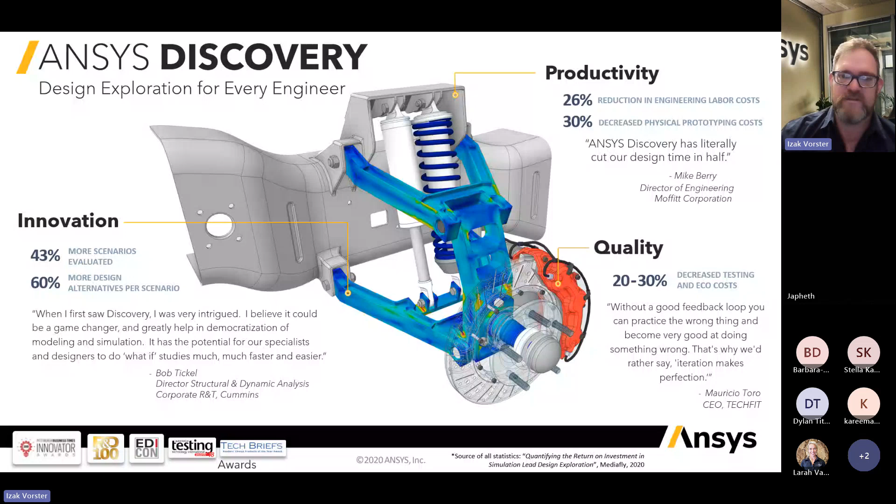Once I figure out how to advance my slides, I'll go to my next one. Yes, there we go. I'll open up the software now so you can see the interface and how it interacts with the user.

In a nutshell, there's geometry preparation included in the software. You can create geometry from scratch, modify geometry coming from somewhere else, scan geometry - this used to be Ansys SpaceClaim, so it's an extremely powerful CAD tool meant for simulation. If you're doing simulation, you don't want all the welding gaps or holes to be there, because they're irrelevant, for example, so to remove those things, it's excellent at doing that.

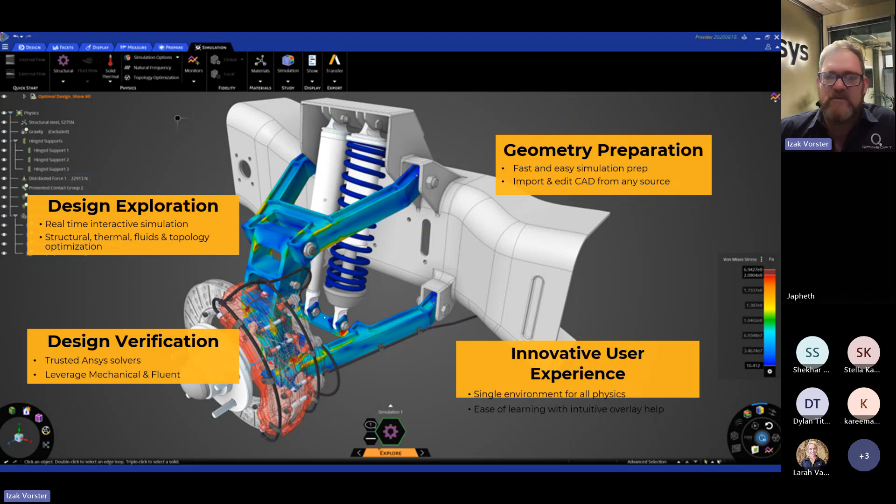The user experience is really very innovative - it's an excellent way to model and work. You can see everything on the same screen. It's a very simplistic menu system at the top with very few commands, but they're really very powerful. You'll see some of the commands in my demonstration in a while.

As far as geometry preparation goes, you can import CAD files into the modeling part, very quickly clean up things, and edit geometry you created previously. It's really very good at converting faceted data to surfaces or solids, so if you've got scan geometry and want to create geometry from there, this is really where Ansys Discovery excels.

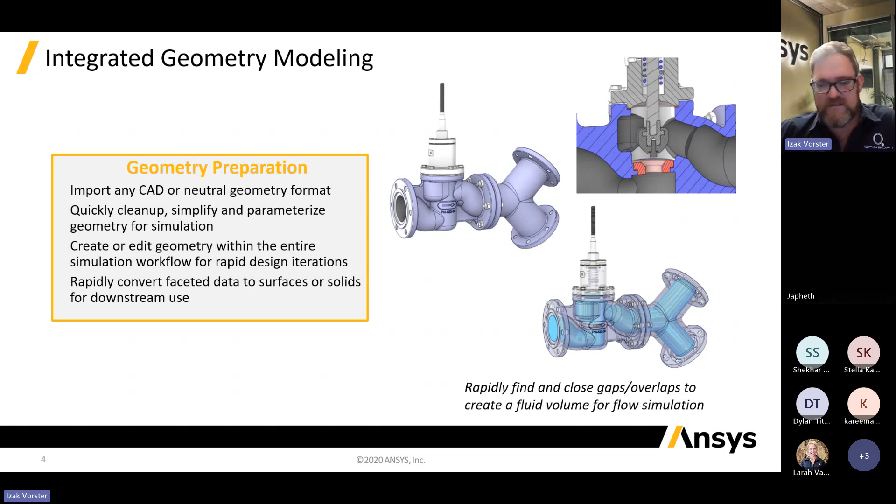Then there's a fluid simulation part, which I'm going to show a bit about today. This is for internal and external flows mostly - not for free surface flows like water in a channel, so there are some limitations with this software. But if you have to look at internal or external flows and alter a couple of design parameters to come up with an initial prototype idea, this is excellent to do that.

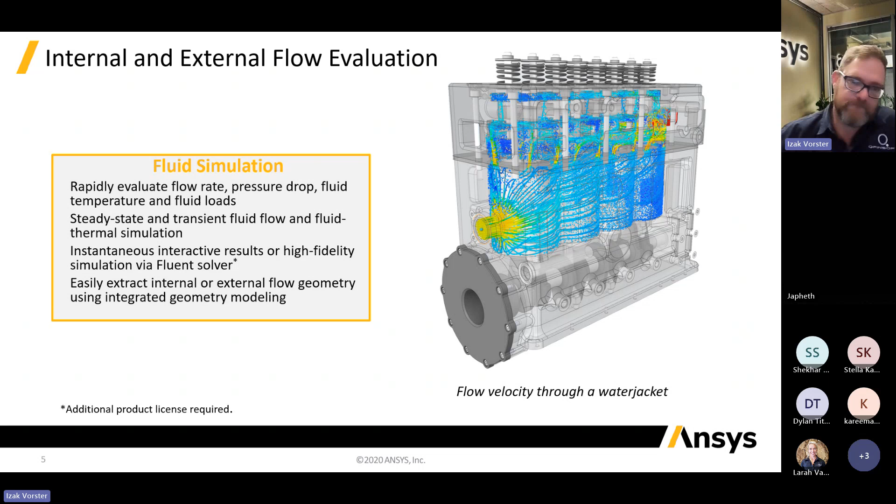There's also a fully functional topology optimization tool inside Ansys Discovery modeling. What it does is actually run a stress analysis, and it will remove the nodes or elements that don't carry any stress.

And it will come up with an optimized shape that will still be able to handle the loads that it experiences, but it will give you this shape.

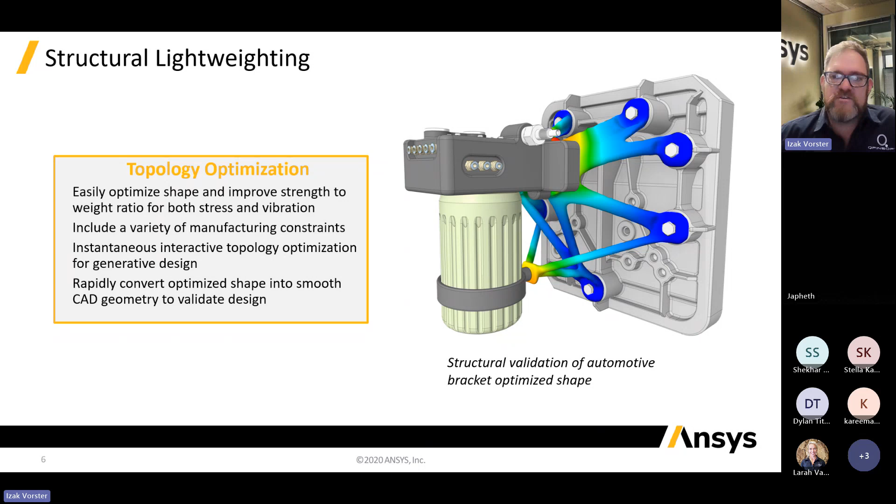This is excellent for people in the additive manufacturing industry, where they are looking to 3D print some of these components. But it is also a very handy tool for engineers to see where they can remove material from a standard bracket while still complying with the design specification.

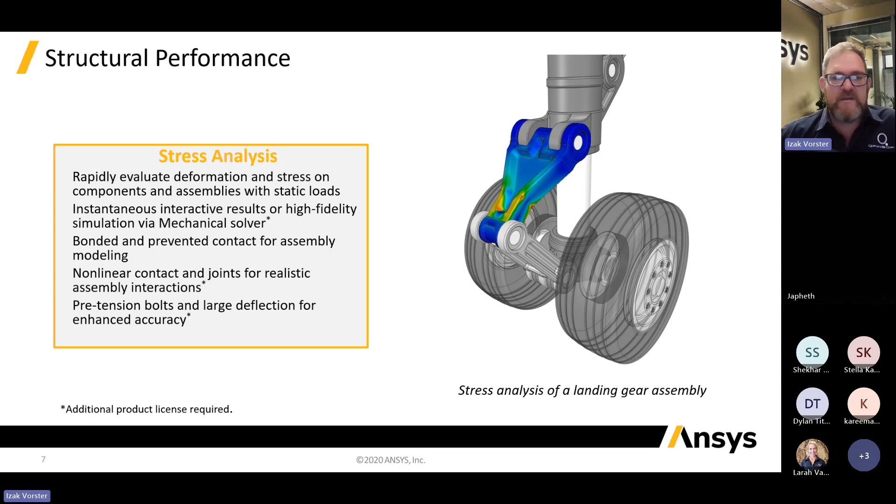Then it's got a full-blown stress analysis tool in there. This includes nonlinear contact and joints for realistic assembly interactions. You can do pre-tension bolts, large deflection for enhanced accuracy, and it gives you instantaneous results. I'll quickly show how that works in my demonstration for you guys as well.

Then modal analysis is very important, as a preliminary kind of analysis with every single analysis you do. If you're a regular FEA user, you always start with a modal simulation to see if everything is fixed, etc.

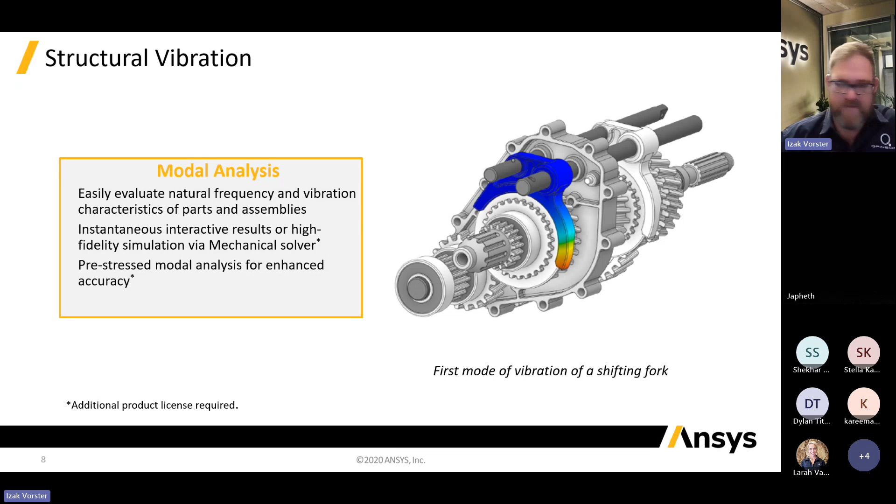And that will give you the natural frequencies of the design so that you can keep them away from the motor operating frequency, or if it's a pump or a rotor, the blade pass frequencies, the harmonic frequencies, or whatever frequency gets excited by the driving components.

Then the thermal simulation is very strong. This is used a lot in electronics, where you've got a PC board with some heat sinks, etc. You want to optimize the heat sink or see how big it must be. You can do that thermal simulation.

Back in the day, Ansys sold something called Ansys Icepak, and that was specifically for doing electronics cooling. In my opinion, it still exists, that product, but this is really taking over that product entirely at a fraction of the cost to be able to do these thermal simulations for electronics.

This is also applicable to any kind of thermal simulation where you're heating something up, and it will give you boundary conditions, convection, heat, insulation, and temperature conditions.

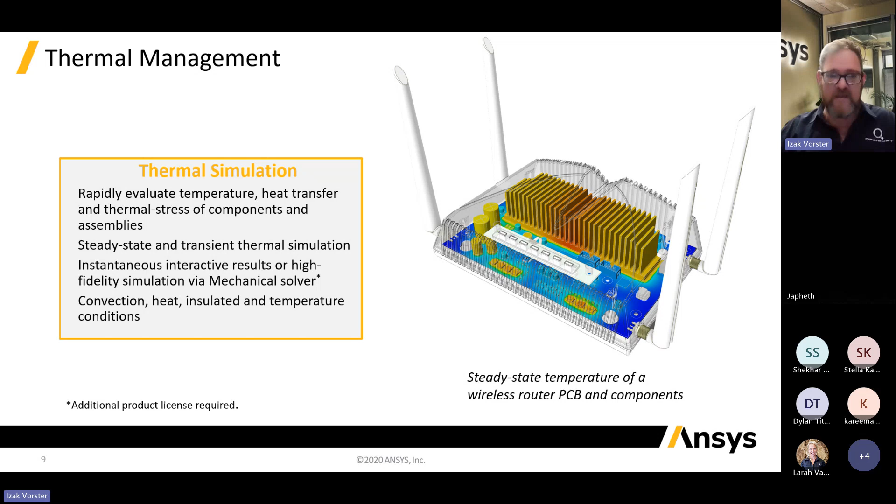And then I think the powerful thing about this is what's next. If you are finished with the concept things and you want to go over to a more detailed analysis, you can transfer this to Ansys Full Mechanical or Ansys Full Fluent. There is another way to go to the refine mode, which I'll show you in my demo.

There are 3 modes in Ansys Discovery. I'll explain that a bit later. But this will take the model and the mesh and everything that you did in Ansys Discovery modeling and directly transfer that to the flagship solutions from Ansys.

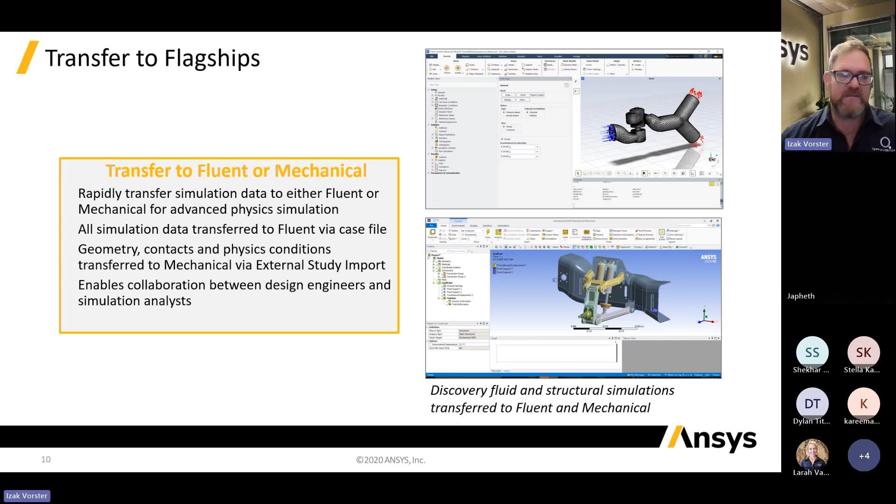And you can continue detailed simulation there further, with more detail, maybe some chemical or phase changes, maybe some crack propagation, etc., fatigue analysis, in structural, whatever the case may be.

And this is just a capability chart. We'll share the capability chart with you guys after this webinar. But it's a very broad application set, I would say. It competes very well with CAD embedded simulation functionality-wise or capability-wise. The only difference, obviously, being it's a separate tool.

It's not tying up your CAD system while you're using it. So if you've got floating CAD licenses, the guys can carry on with that, and the designer can access one of these floating licenses and use it. The depth is comparable with what you get in CAD simulation or embedded CAD simulation.

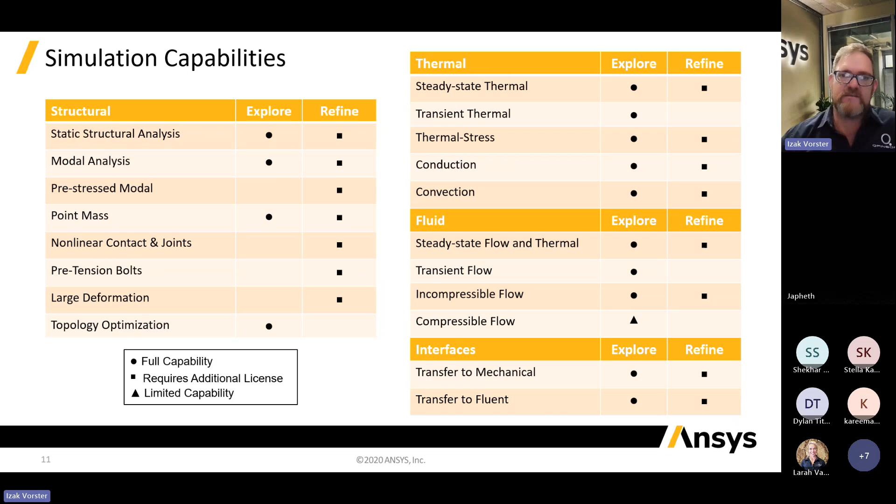I'm going to switch over to the software now so you can see that. So let me close this, and I'm going to open it up from scratch so you can see that I'm not playing a video.

Can everybody hear me? Is everybody still there? I've got no feedback of who's in the meeting. So am I still in the meeting? Yeah, can hear you. Fantastic. I would hate to finish my whole demonstration and then find out I've never been in the meeting because the internet dropped or something. That will be a bummer.

All right, I'm working on 2024 release 1. And this software runs mainly off your GPU card for the computation side.

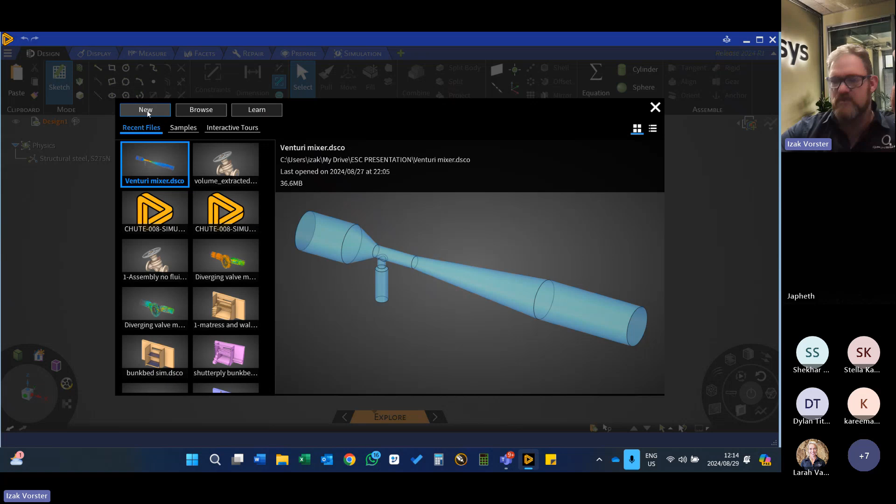And then your CPU is being utilized for geometry modeling, for some of the graphics. Your graphics card is being used. The graphics card that I'm using is a 3060 GeForce card, so it's nothing fancy. You get much faster and better cards.

One thing to note, though, is that even though I'm the sales guy for Qfinsoft practically, my laptop isn't what the technical guys' laptops are, with 4080s and 4090 cards. But the better your GPU card is, the quicker these things will happen for you, especially on the simulation side.

Right. What you see in front of you is the software interface. This is a very intuitive user interface. You will see that I'm in the design tab now, which will allow me to create geometries, all kinds of geometry modeling.

Then there's a display tab that will allow me to manipulate display things. And then there's a measure tab. You can pull all kinds of information from the geometry on hand. And then there's a whole tab for facets when you've got scanned geometry coming in, and for repairing geometry. If you're importing things like STL files or Parasolid files, then there's some problems. It's very, very powerful with that.

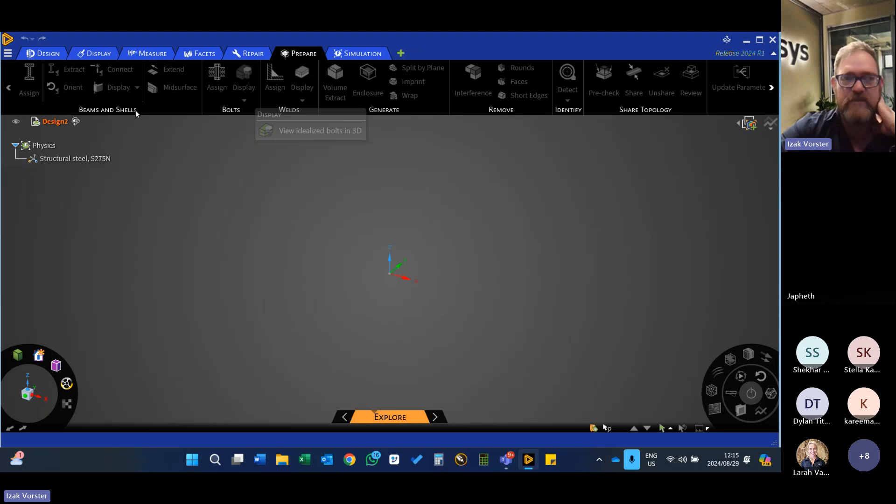And then there's a prepare tab to prepare your geometry for simulation. And then there's a simulation tab. And we're gonna go over all of these things in the next couple of minutes. Right. I'm going to show you a bit of the modeling, because that's really where this thing excels if you're starting with a new concept. And my example of choice is a Venturi mixer.

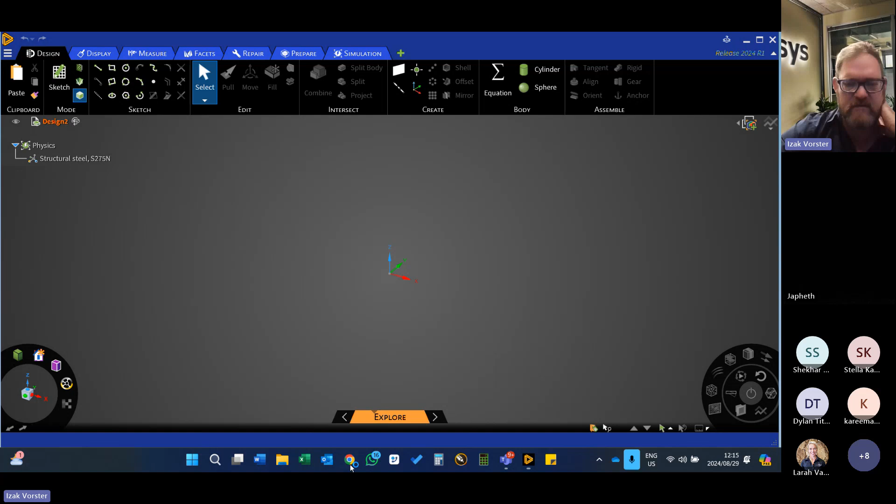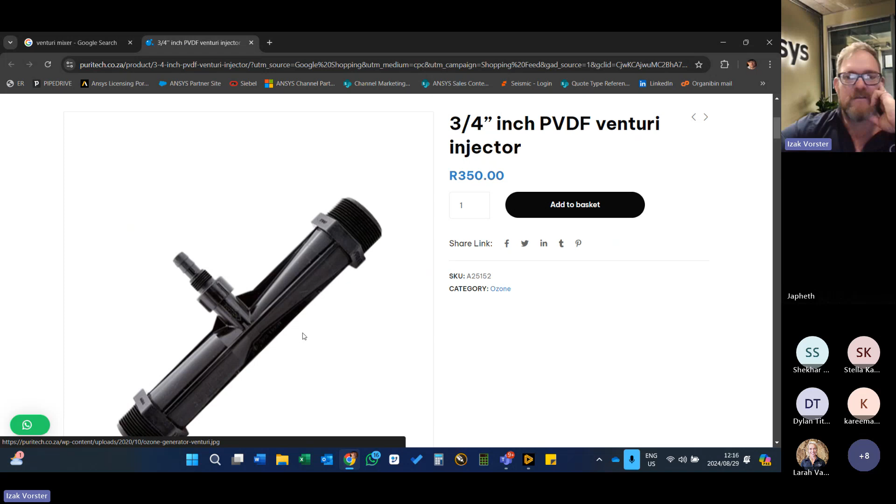I don't know who's familiar with that. Do you know what the Venturi mixer is? Let me show you. This is a Venturi mixer. So what's basically happening is you've got flow coming in on the inside, and you've got some flow going out to the outside, and then it will suck up some fertilizer or some gas or some liquid, and it will mix it inside this thing. And then the outlet will contain both fluids.

That's a very good example of this. This is the irrigation one. That's typically what mine is based on. So let's just make a couple of observations here. This is the inlet side. And then it narrows down, which speeds up the flow. And then it will create a low pressure zone around here somewhere, which will suck up some of the liquid that you put on that side. It will mix it in this chamber and it will spit it out on the other side. Right, that's a very good explanation of what it is.

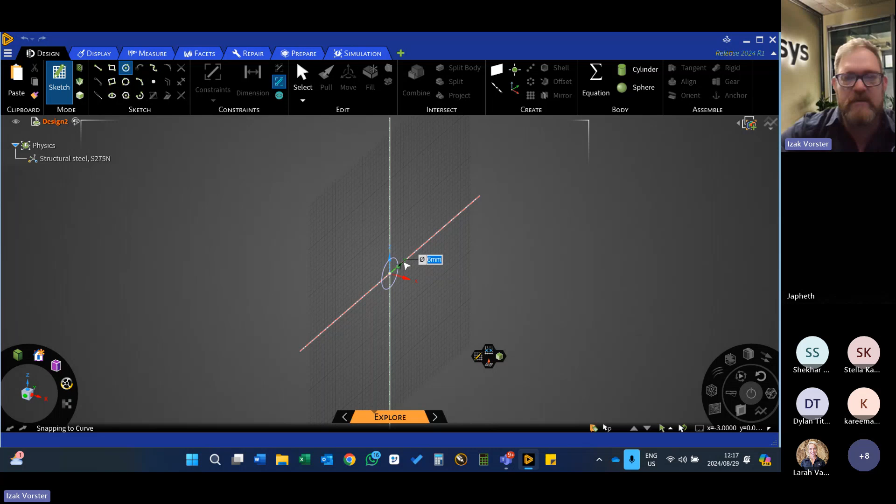Right, so let's draw that quickly. I'm going to start with selecting two of those axes. And I'm going to create a circle. I'm going to start it from the center. So let's make that a 10mm diameter little circle. And then we've got this powerful thing in Discovery called the pull tool. And I can extend that to, let's make it a long one, just for 20mm. That'll be the center section that I'm going to model.

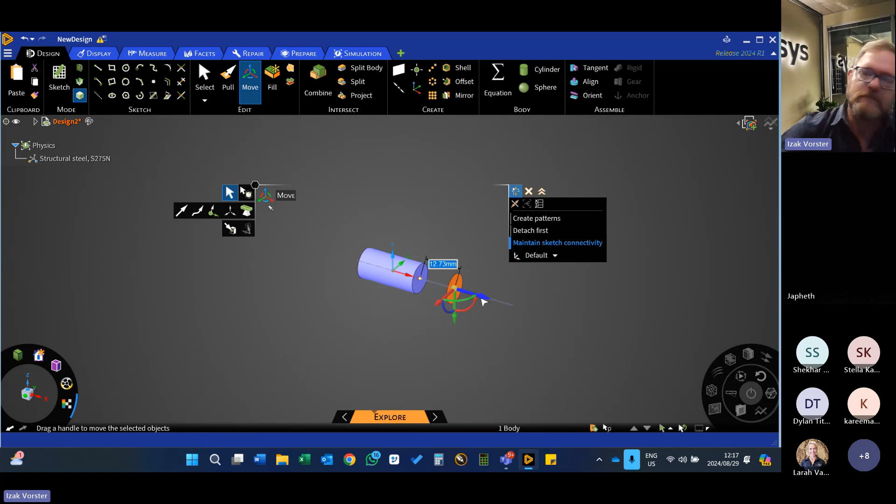The nice thing about Discovery is I can copy faces and paste it. I've just done that, by the way. And then I can move it along. So let's move this one about 40mm along. And then this pull tool also works wonderfully if you select the edge there, and you can offset that by 5mm. That will make it a 20mm circle.

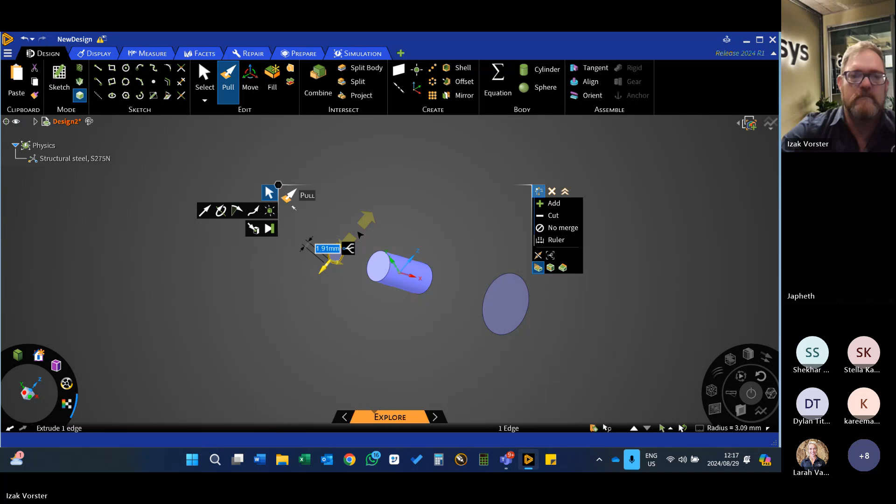And I'm going to do the same for this side. I'm going to copy that face. I'm going to paste it. I'm going to move it out, this time only 20mm. And then I'm going to pull that bigger. Right, and then I can create the loft bodies by selecting two of these. Let me first do this. Let me just pull that thing 20mm that side. I've got essentially three solids now.

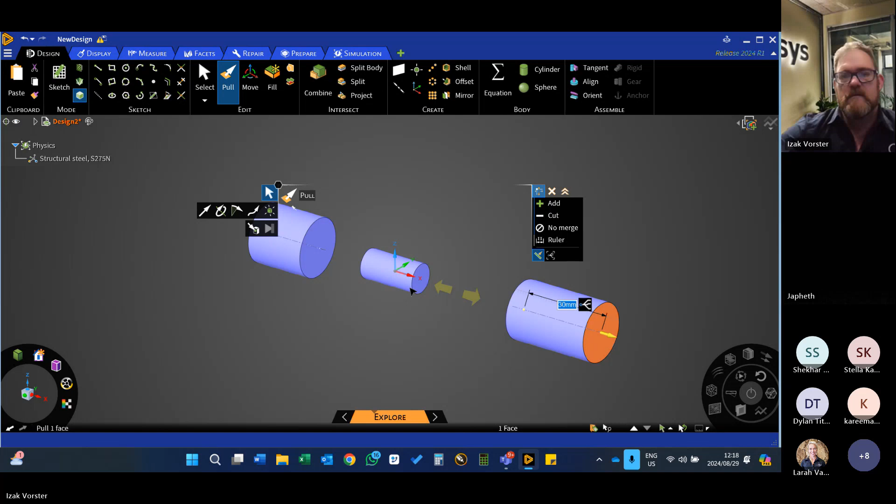Right, and then I'm going to create a lofted surface between. You can select the edges like I'm doing there. It will do that for you. I can also select the faces, and it will give me a very nice shape in there. Don't really want to do that right now because my demo hasn't been prepared in that fashion. I'm going to make some changes.

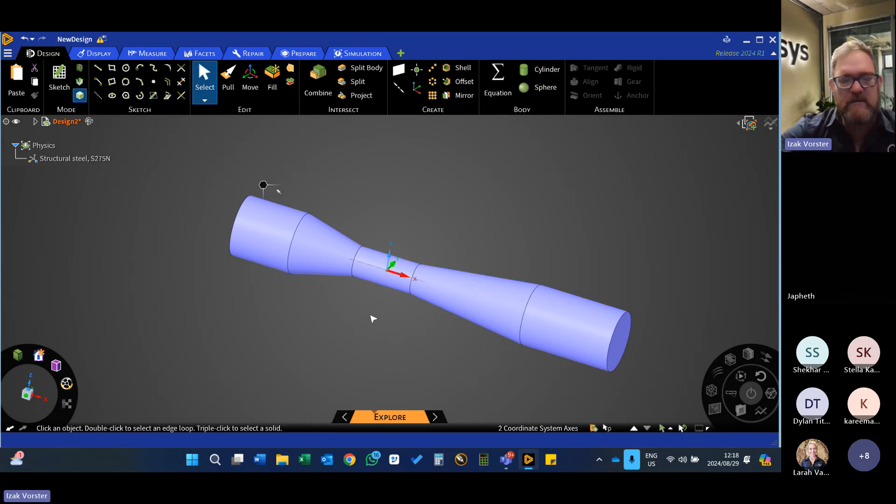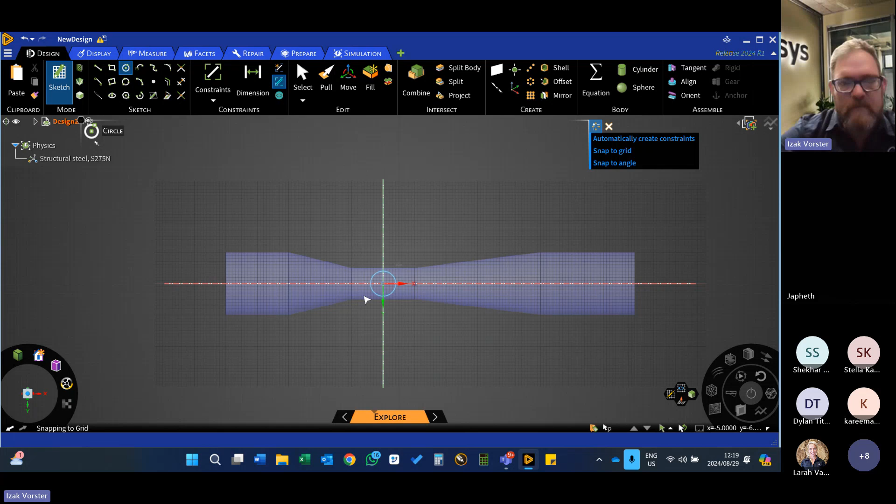Right, now we need to put the inlet on the bottom of the suction pipe. So I've selected two axes. I'm going to create a plane there. Then I'm going to move that plane down about 20 millimeters, and then I can draw on this plane. So let's draw on that, view it normal, and I'm going to make a little suction pipe of 8 millimeters. And then I can pull that suction pipe up to next and select that surface.

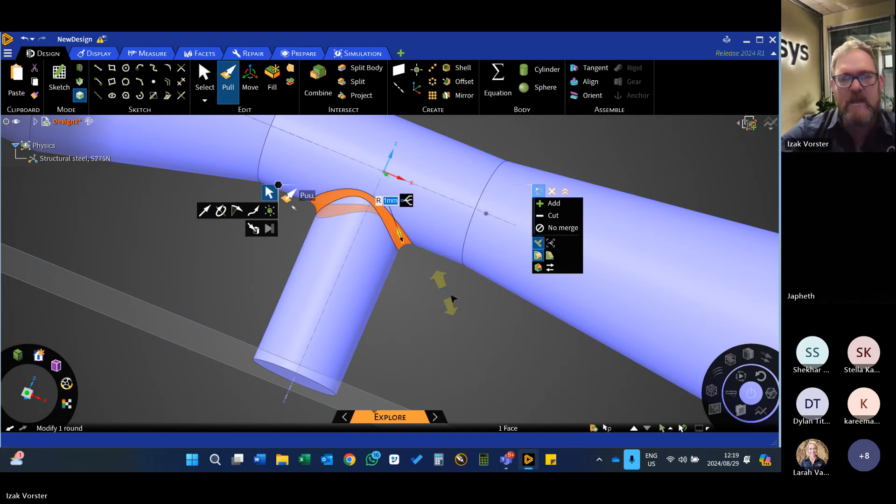Let's make it a bit fancier by creating a fillet into that edge there. You will see I selected a pull tool and I selected the whole edge and I'm just dragging that out and I'm giving it a 1 millimeter radius. That'll make it a bit more smooth. Right, this plane I can delete now. I don't need that anymore.

Right, just a quick thing on this pull tool. I can select any face and I can actually make it bigger and smaller as I would like. I can move this out. It's free-form modeling, so there's no tree on the left-hand side where if I delete that face, it will tell me I can't because there's a fillet attached to it. It's really free-form modeling.

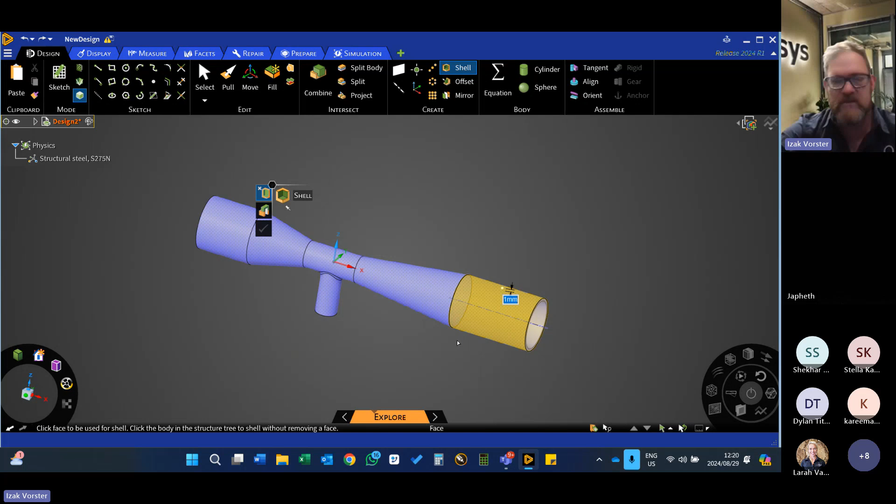This is excellent for testing concepts, for editing geometry, etc. Right, the last thing I need to do is to just shell this whole thing and select all the faces that I want removed from this piece and give it a shell thickness. Let's make a shell thickness 1 millimeter. And then that will be my Venturi mixer. You can see there's a nice gap on the inside. All right, so there's my initial design, let's call it that.

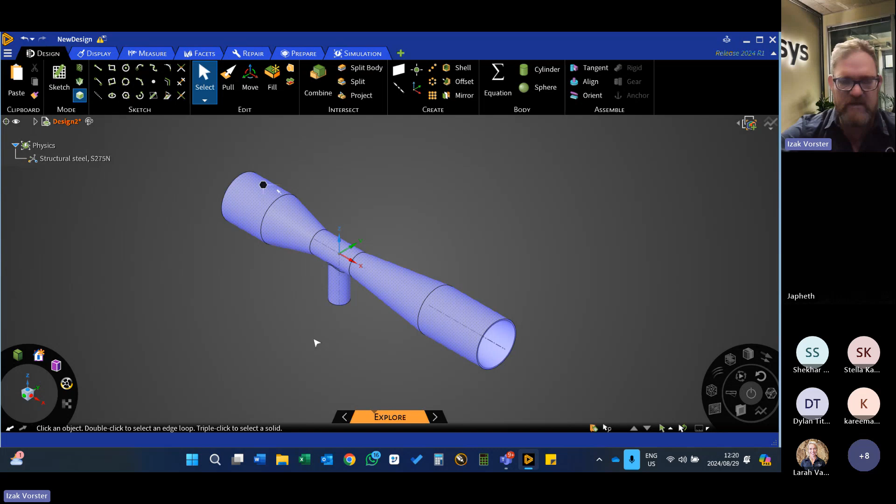Right, the next step will be to do a fluid flow analysis where the water is coming in from this side and it's exiting on this side, and then there will be some low pressure sucking up some liquid on the small Venturi there. I need to create a fluid volume because the simulation will run on a fluid volume, and I have to define that, right? So I'll go to the Prepare tab. It's very easy to do a volume extract.

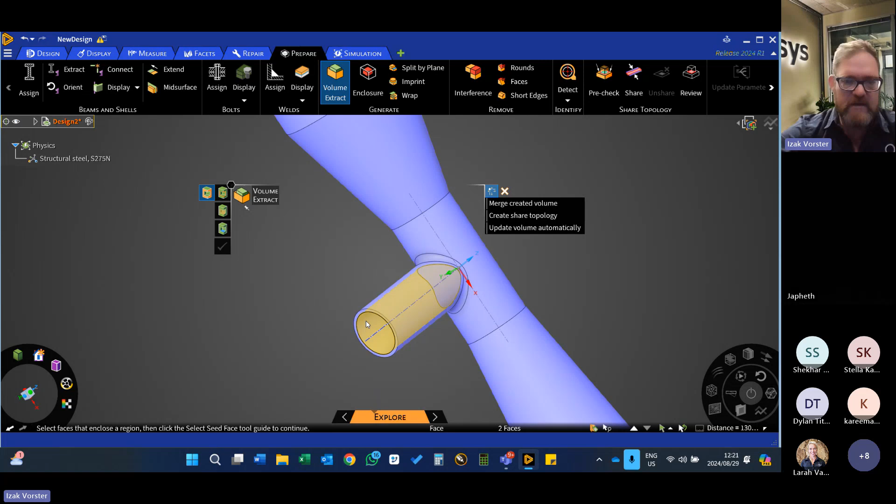It tells me to select all the capping faces. So I'll select that capping face. I'll select this capping face. And there's the last one here. And that will enclose the geometry. And then I just have to give it a seed face so that it can calculate the fluid volume. And you will see up here in design, there's a volume, right? That's that volume. There's the solid.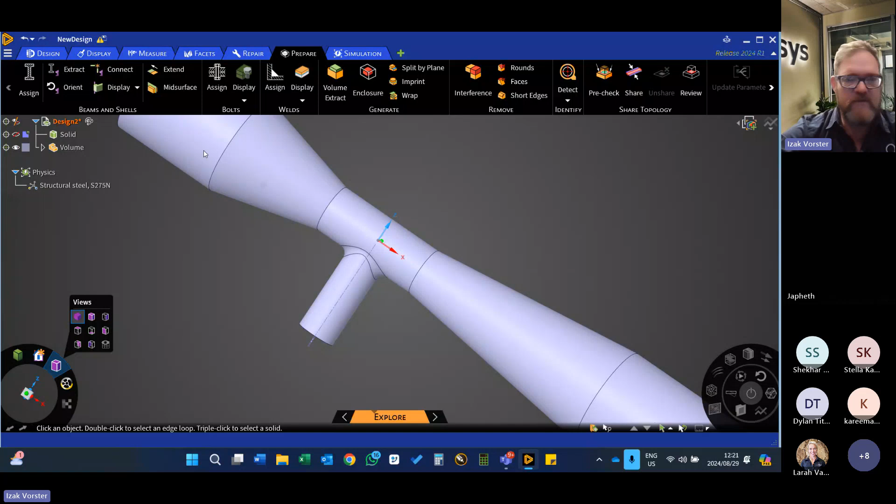And we can hide that solid now because we don't need it anymore. I'm just hiding it, I'm not putting it completely away. So that's the fluid volume, and it's ready to be simulated. Right. I need to assign a material to this. I would like to tell it that this is water. You can make it a gas also if you want. I think water is a more touchable substance in our case because we all know what water flows like and what it feels like and how heavy it is. So that's great.

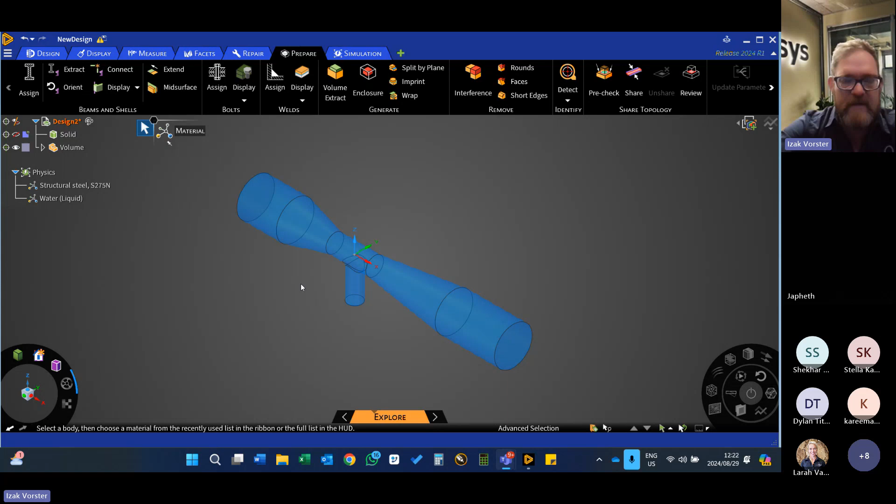Right. I've got no idea what these sizes should be. I just pulled them out of my head. And my experience with designing these things is zero. So I need to optimize a couple of things now. Right. So let's go to simulation now. And I'm going to tell it I want to do a fluid flow simulation. I'm going to define some conditions.

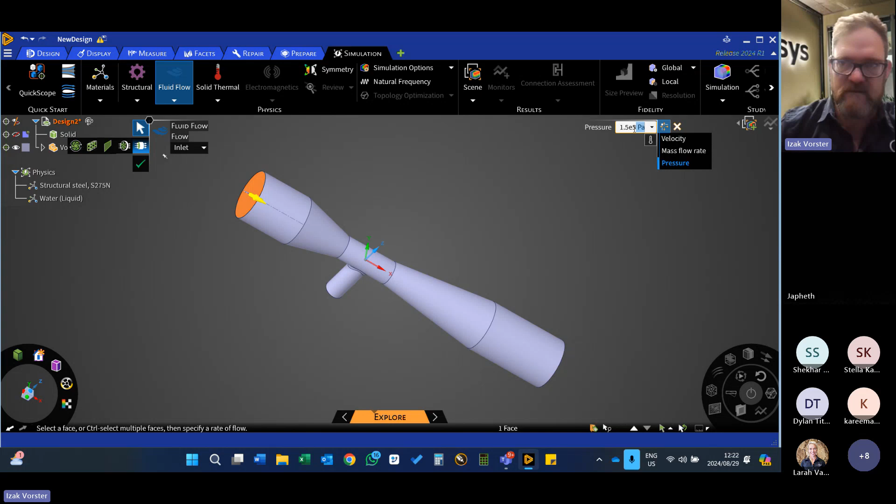It's asking me for an inlet, so I'm going to define this as an inlet, and I'm going to give it a pressure. Now, usual water pressure on your water outlet in your house should be around 150,000 pascals or 1.5 bar. That's one inlet. I'm going to define a second inlet. This is a suction pipe, so I'm going to define there a pressure of 0 because that will be open to atmospheric. We'll see the inlet conditions are being listed here.

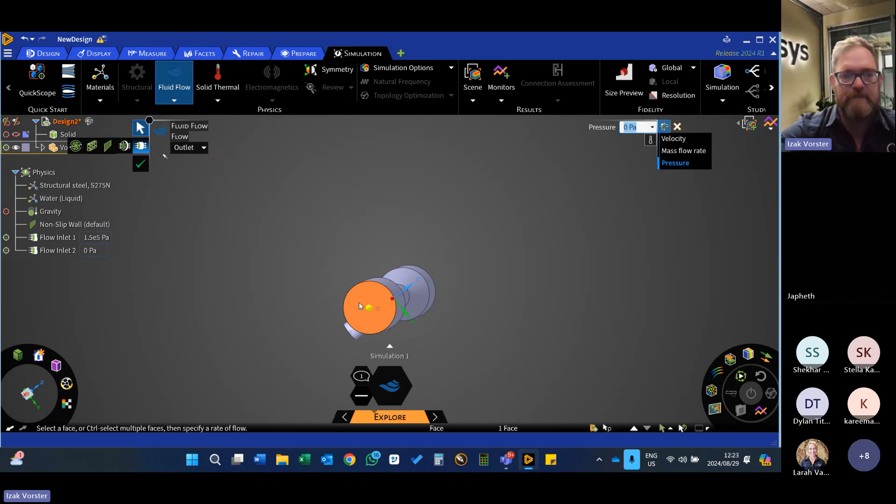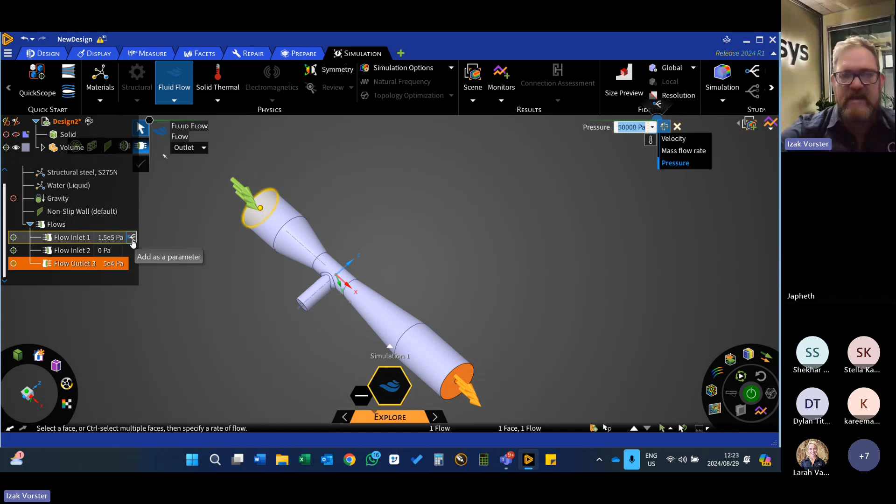And then I want to define an outlet. Yeah, goes out. And I want to give that a bit of back pressure, half a bar or so. Right, you can see there's my conditions. Just notice how if I go to these things, I'm able to click on that little button that will add as parameter. So if I can put the analogy with a CAD like SolidWorks with parametric modeling, where you can change things afterwards, Discovery is a parametric simulation package. So it's very easy to define parameters in this way.

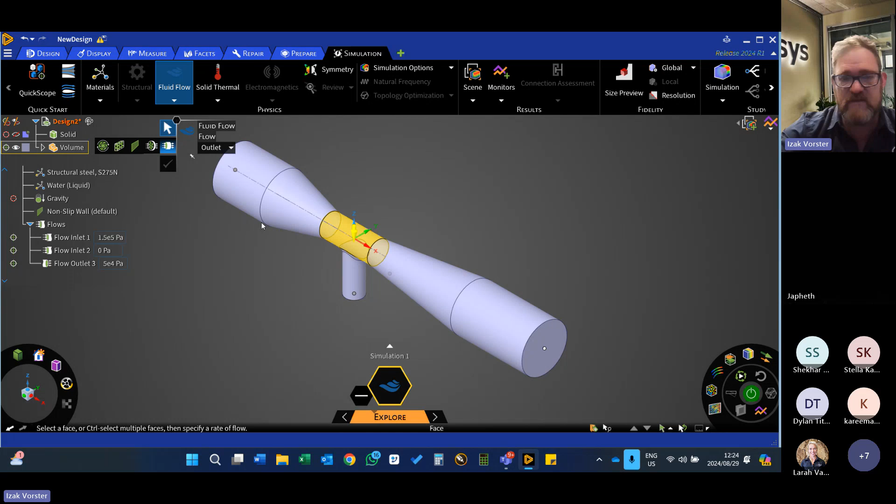Right, the only decision I have to make is if I'm going to switch on gravity. If the flow is fast enough, I don't have to switch on gravity. I can if I like. I'll just put it on. And then I'm ready to solve this thing. So here we go, let's solve it. Let's see how long it takes. It's starting to develop. I'm plotting velocity here. Let's look at it from the side, maybe. It's a bit of a better idea.

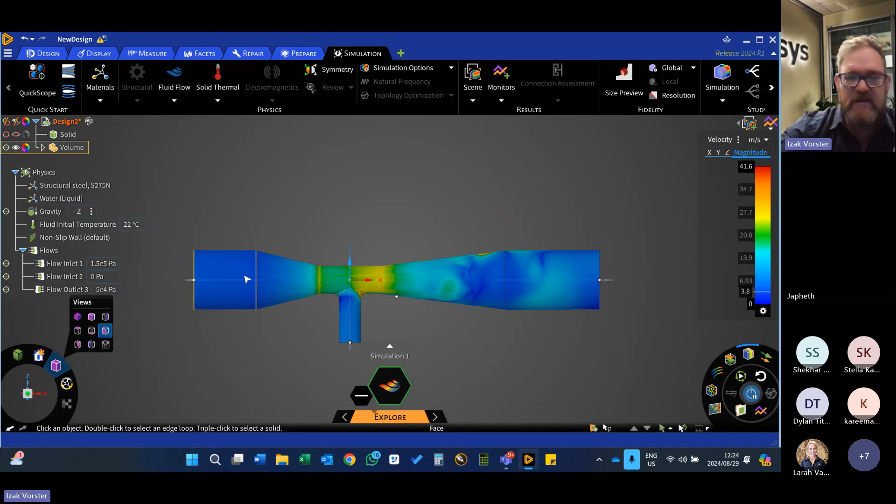We should see some high velocities in the beginning here. You can't hear my graphics card, but my GPU is starting to run a little bit. It's searching for a steady state solution, and once it has it, I can do different kinds of plots here. So I'm able to plot streamlines, for example. Take that away to show me what the flow looks like.

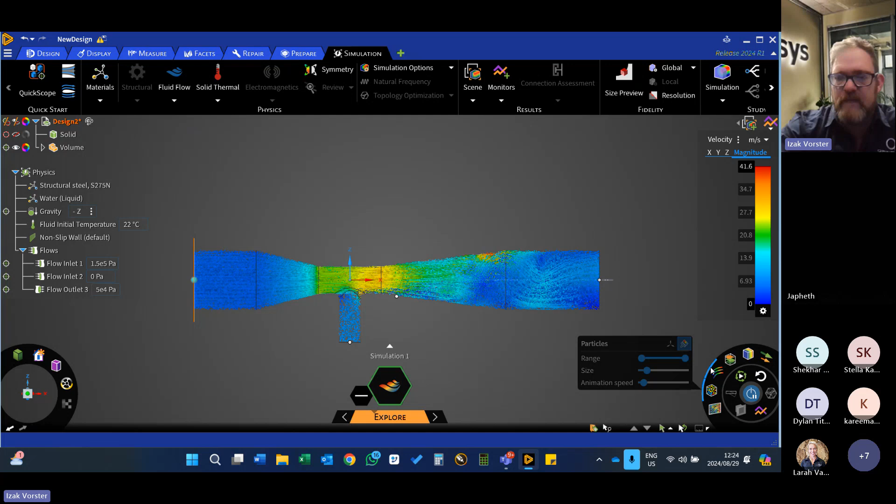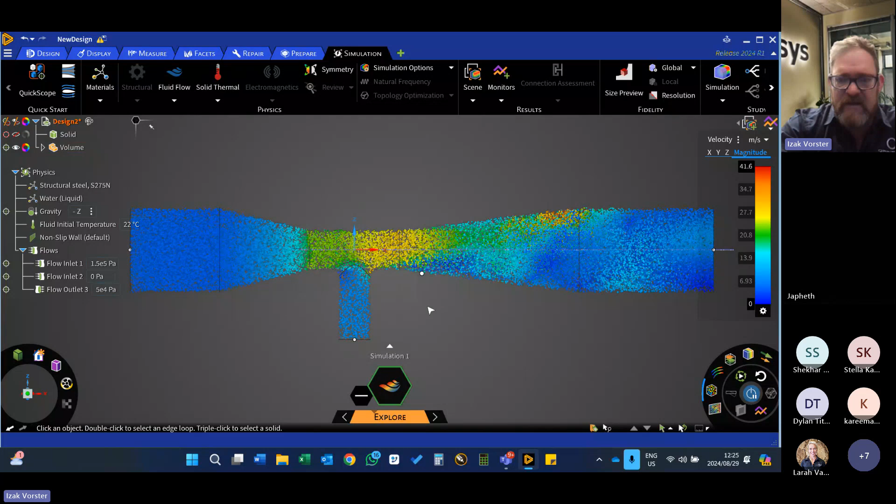I can make the particles move like this, and we can see it starting to speed up there, and it's starting to pull in some fluid into that region. There's a lot of recirculation in here. If your intention is to mix some of this fluid with that fluid, that's excellent. That's kind of what you want. But now I need to see how effective this is, right? And how much fluid does it pull in here, etc. So let's change it a bit. I know from what I've seen on the internet that this little diameter there is still a bit big. So let's change it, right?

Let's just get a nicer graphic going. No, that's not very nice. That's okay.

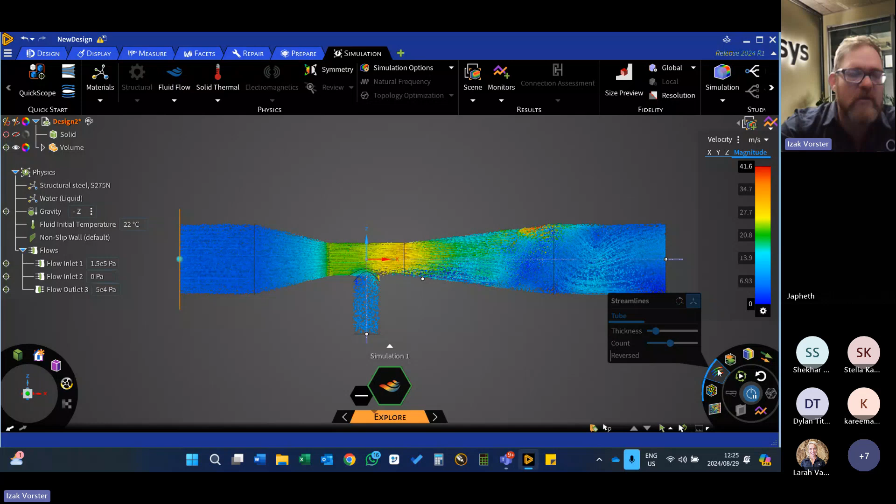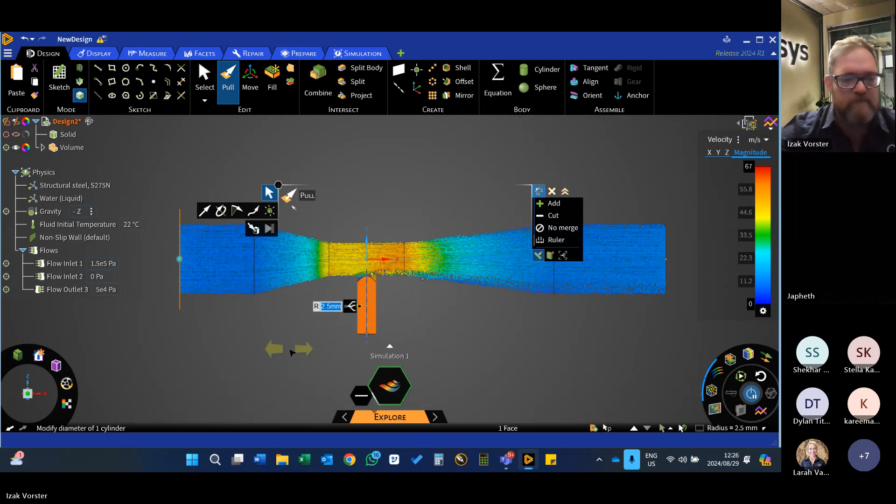All right. So while it's busy simulating, it's running off my GPU, remember, I can go to the geometry tool, the pull tool, and I'm going to change that from a 3.5 millimeter radius to a 2.5 millimeter radius. And you will see that immediately the solver will recalculate the results and it will display it to me in this fashion. Right.

Can somebody say this is cool, please? I feel like I'm doing a demo to myself. I've got no faces. That's fast, eh? It is impressive. Okay. Interesting.

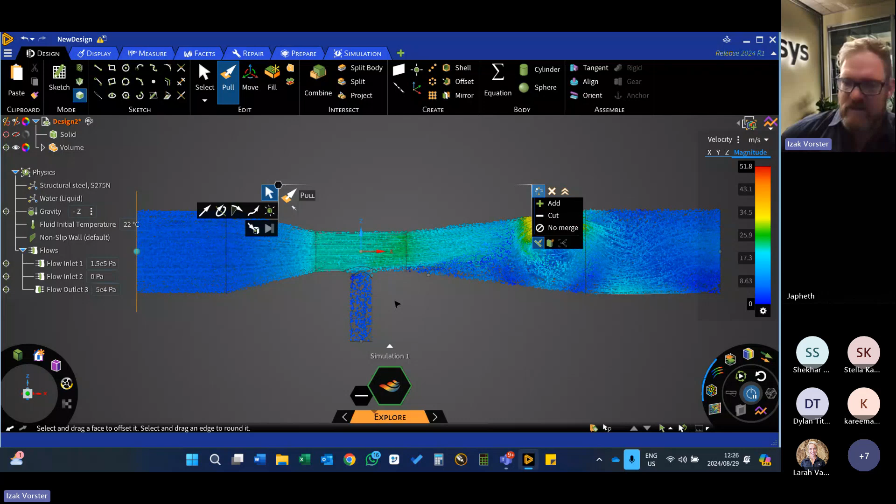So maybe you guys can realize now how this tool fits into the engineering tool set, where you have to come up with a design that's workable and then optimize it a bit. And that's exactly where the software fits in, right? Let's make another change. Let's make that diameter a bit smaller.

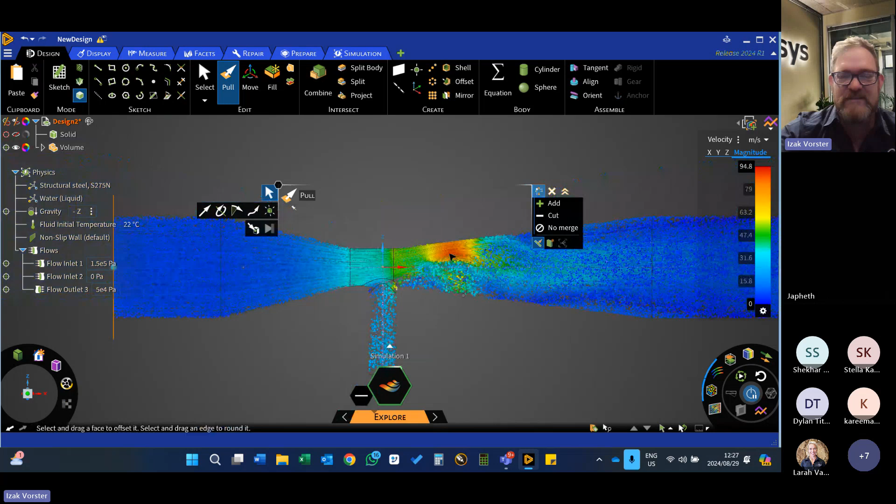So the fluid should, oh, I broke it now. I didn't really break it. The solver is still solving. You see where my Venturi is coming in now. You can see this mixing region there. So it's actually updating. It's solving that whole thing. It's building a mesh. That's fantastic. I'm impressed by that. I wasn't supposed to do that. I want to move things around a bit first.

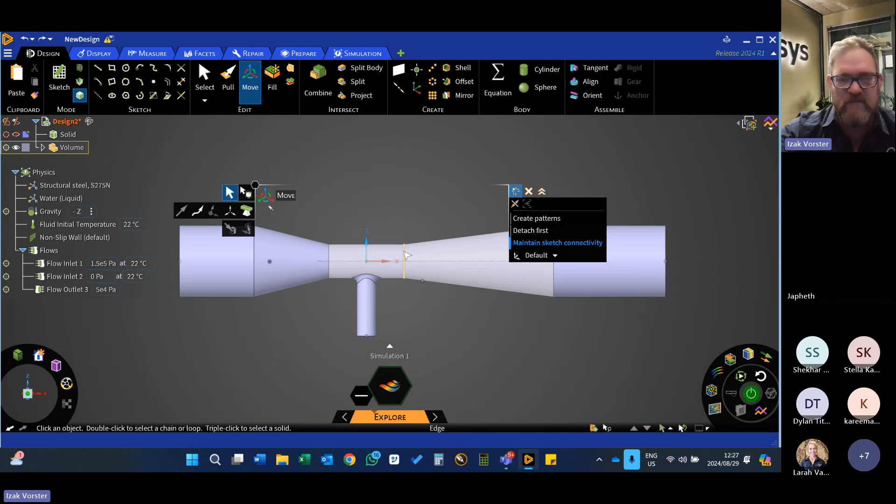I can pause the simulation at any time, like here, and I can make some changes, right? So even if I go and I move this edge there a little bit further, let's move it by 5 millimeters, I can tell it to solve the simulation again, and it will go. It's solving for a steady state simulation currently. You can set it to be a transient solution in here. There's simulation options and calculation type.

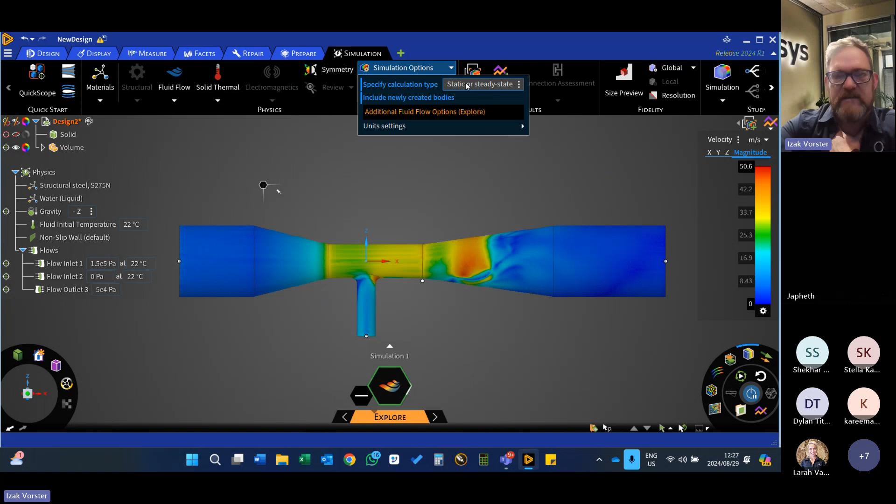It's now static. I can set it to a time-dependent study, and it will update, and you will see now how the flow develops. Let's just look at some vectors here. You can see initially the flow is coming in, it's pushing out there, and then as the solver starts developing, it will sort that out, and then the flow will start pulling into there. So it's good to give it a couple of minutes to settle. On a very fast graphics card, this will happen almost instantaneously. With me, you can see there we've got nice flow going in.

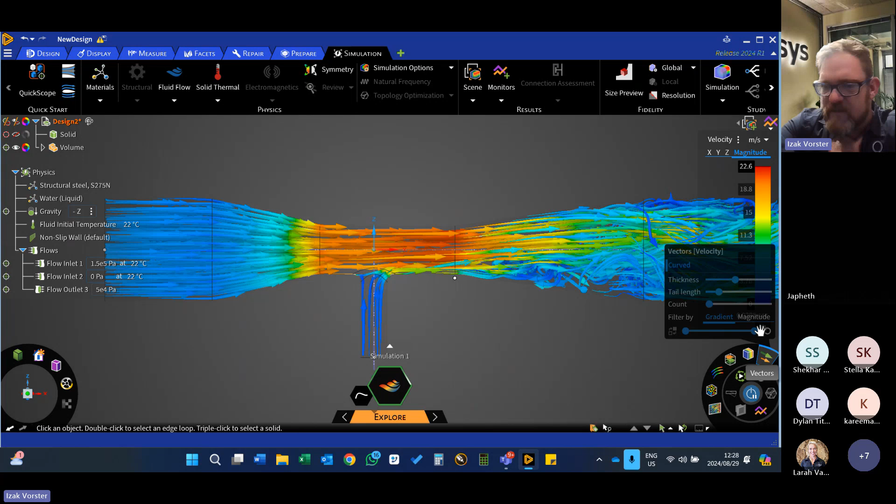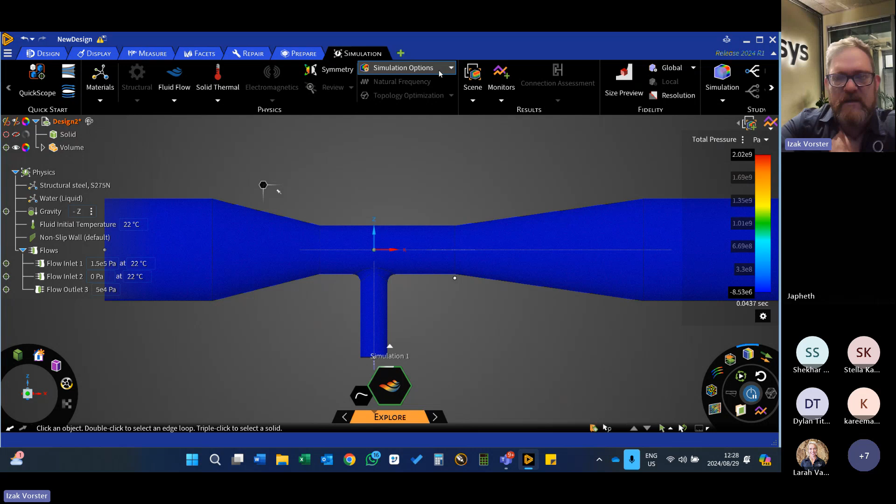I can also set some parameters, the thickness of the lines. I can make them a bit thinner. If I want to look at pressure, I can go to the static or the total pressure here. Give me the pressure difference between this. The transient is obviously taking a time to develop the flow. I'm going to switch back to static because I want to show you the cool thing about the software. It's coming. Like the particles, for example, I can make them bigger,

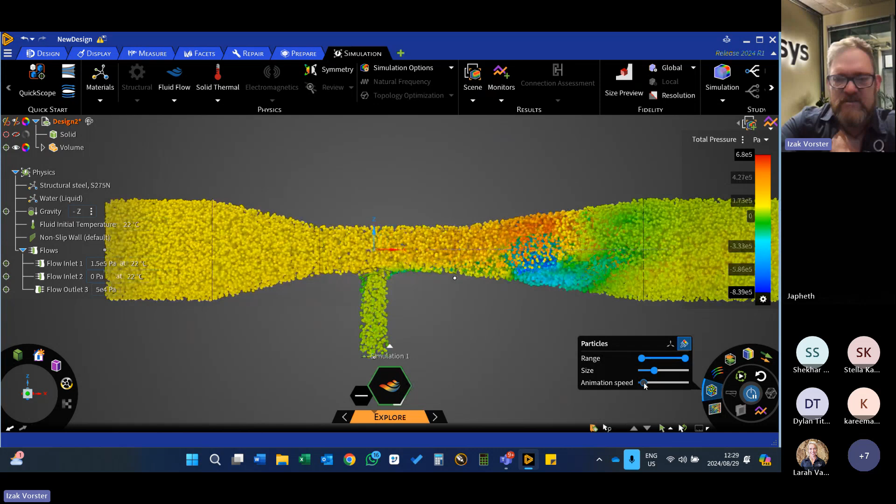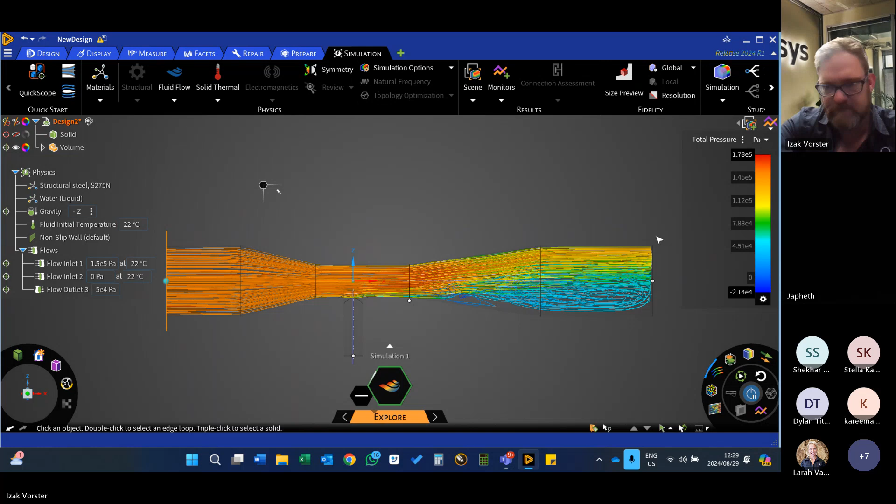make them smaller. So I always had this joke that CFD is colors for directors, and it's very true because the moment you put color and movement to anything, it really becomes very understandable to non-engineer people. Right, there's a good idea of what's happening. Let's look at the flow lines. It's looking much better here. All right, let's play around with this now a little bit. Let's just do that. Save a bit of resource.

I can go now and define some monitors, right? So let's say I'm going to select that face there, or that inlet basically. And I'm going to ask there for a mass flow or volume flow. I'm going to tell it, okay. So you will see this little thing appears. And it's a graph of the current design point. And it gives me a result as well of 0.0264 kilograms per second.

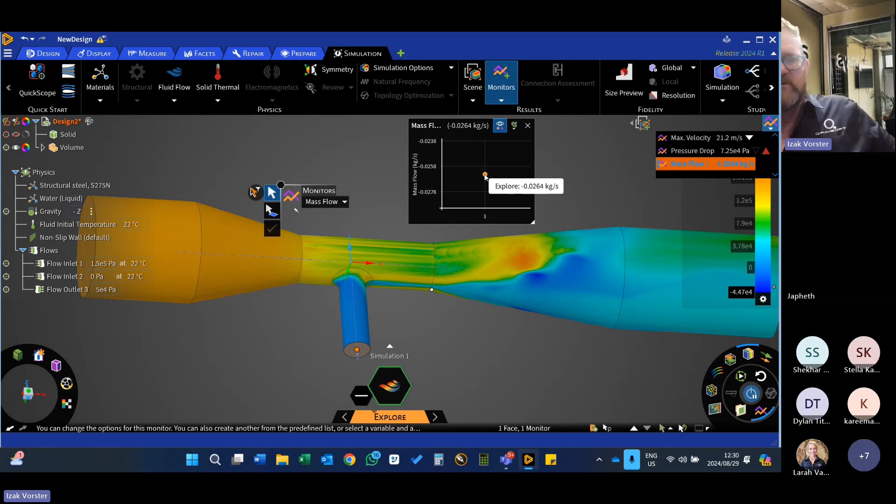A kilogram is roughly a liter, so that's roughly 26.4 milliliters of water per second, which is quite nice. If you had to buy all that liquid fertilizer to go in there, that will be quite expensive. So we want to reduce that maybe a little bit, or maybe you want to increase it to make the mixing more efficient, etc. It depends on the application.

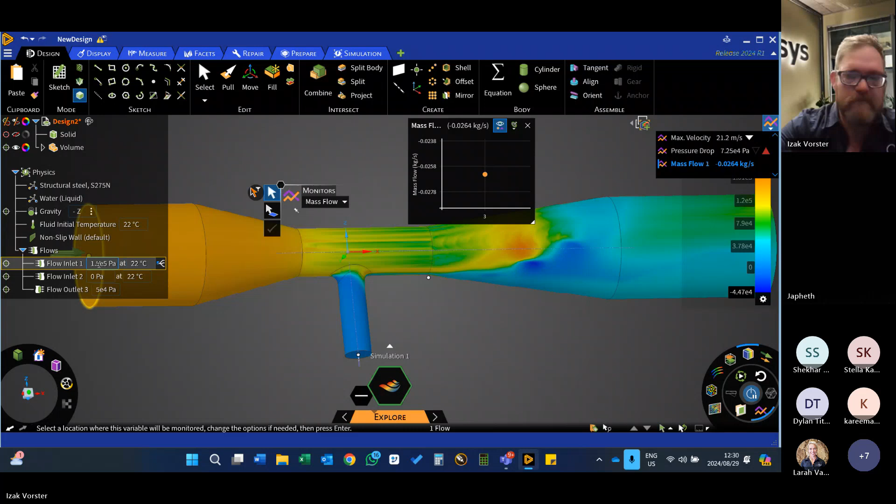Let's define a couple of more parameters. This is now a monitor, so I'm just merely monitoring this. So if I change something here, let's change the input pressure to 2 bars. Let's run it again. Right, we can monitor how that will change.

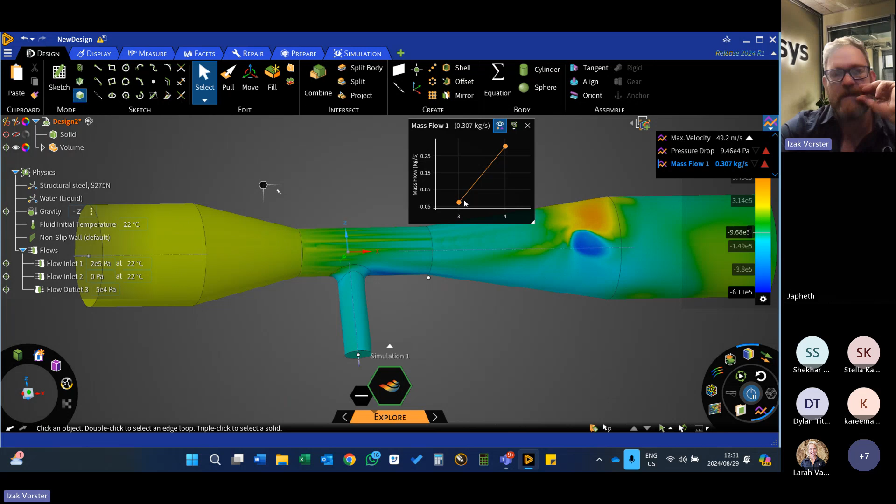So it's very cool to play around with it. That's why I'm calling it kind of gaming for engineers. You will see that my mass flow rate has increased quite tremendously by changing the inlet pressure. So if I lower it back to 1, that's probably where I will get to. So I can hit that immediately. It will resolve the thing. It will give me now a third point, or third design point.

And this is gaming for engineers, but you can tell your boss you're sitting and playing with Discovery all the time. Right, so there we are still a little bit more than what we were at, but I think it's a good idea to show it like this, right?

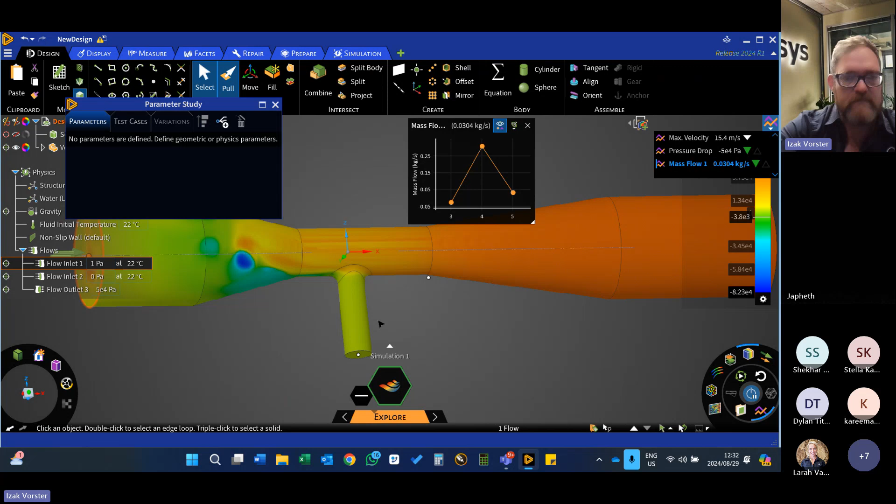The other thing I can do is I can define some parameters and do some studies. So I'm going to do variations on this. I have to define a couple of parameters first, right? So let's go back to the design geometry. Let's make that dimension there, the 2.5 millimeter, a parameter. All right, so we want to see how that size there is influencing the result. Okay, we can also add another one. We can add that parameter there, hidden behind that little monitor. I can put this somewhere around here.

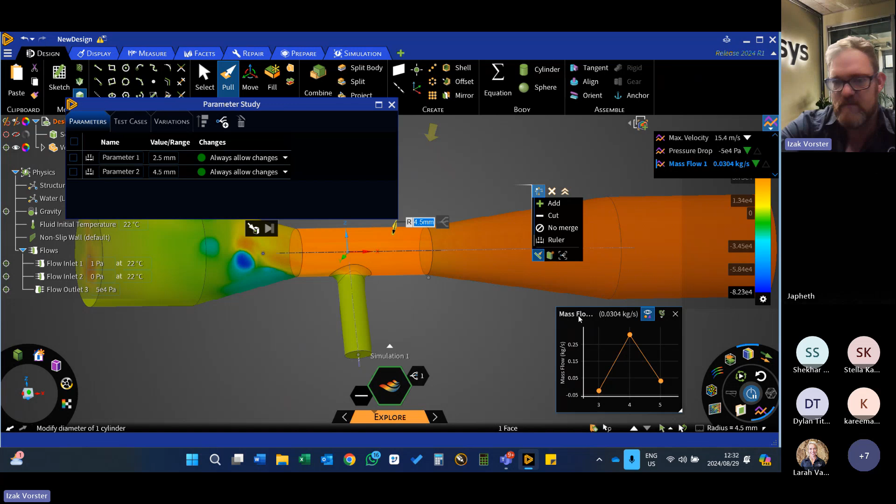Right, let's go to variations. And in this window here, I just want to update the current one quickly so that it calculates the values. Right, so there's the current design point where parameter 1 is 2.5, parameter 2 is 4.5. It will give me a max velocity of that. There's the pressure drop through the valve, and the temperature will be the same. I can omit that if I want to, and there's the mass flow.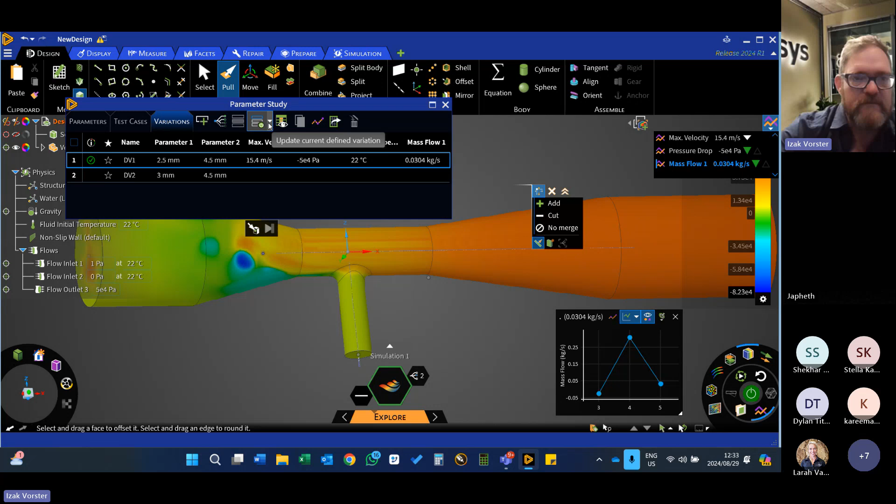I can add a design point now, or variation, and let's see what happens if I change that venturi diameter to 3 millimeters, for example. And then I can tell it to, let me just select that one and make that the current one, and update that design point. It'll take a couple of seconds.

You can see there's a little stop sign next to that parameter value, so it's busy recalculating my whole design. And once again, the better graphics card you have, the quicker this will happen. I don't have the greatest card of all the cards available out there. So yeah, it gives you a good idea. Right, there's the result. You can see how I'm monitoring the mass flow.

I can do another variation, and this time I can say, okay, what happens if I make this a little bit smaller or a little bit bigger even? It doesn't matter what. Let's do a 4mm one. And there's an option here to update all design points. So then it will recalculate all of them. And this will take a bit of time.

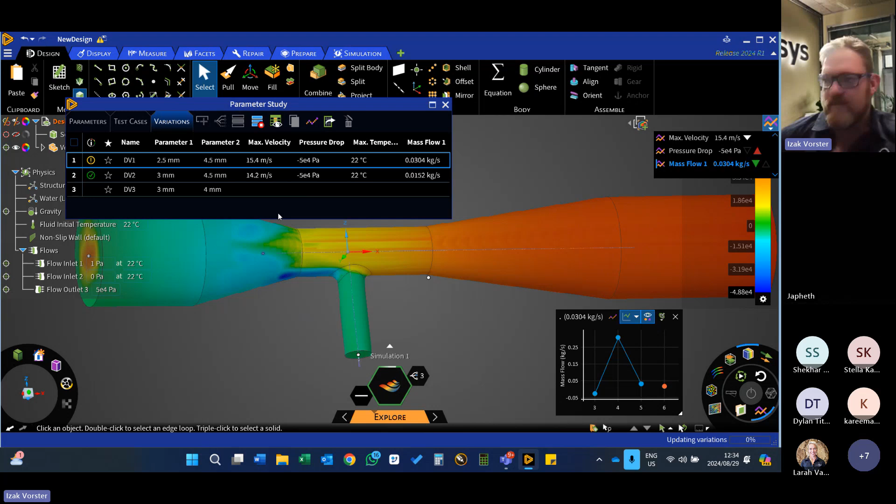So this is the explore phase. So we had the model phase where we model the geometry. Then we've got the explore phase where you can play around with design parameters. And this has got a separate GPU solver, and that's called the Discovery solver. And it's got its own method to calculate the results. The next step would be, I just want to let it finish that design point. The next step I'm going to show you is the real Fluent GPU solver. And that's embedded in here.

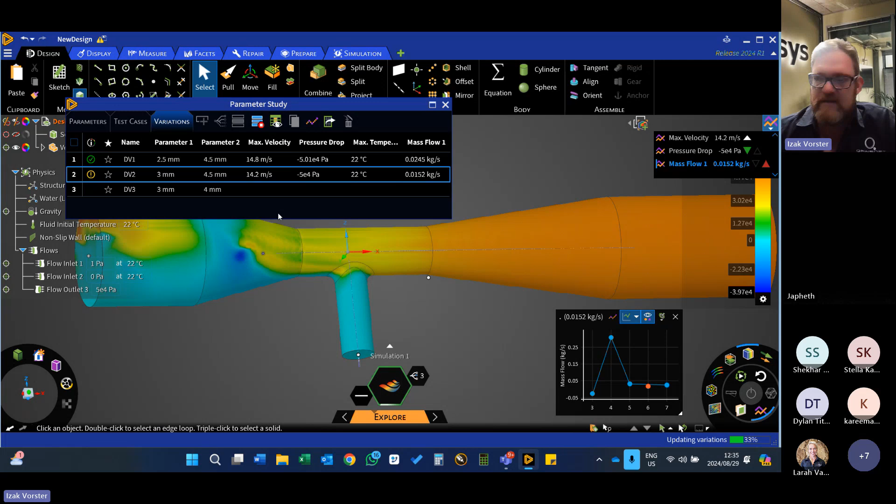Now, the fact that Ansys has embedded the Fluent GPU solver inside this thing tells me that this is the new face of simulation that we will see in 10 years' time. And everything that Ansys offers will be sitting inside this interface. It will run on a GPU natively. I don't know who of you are aware of the acquisition by Synopsys. Synopsys bought Ansys this year. It will become effective in January.

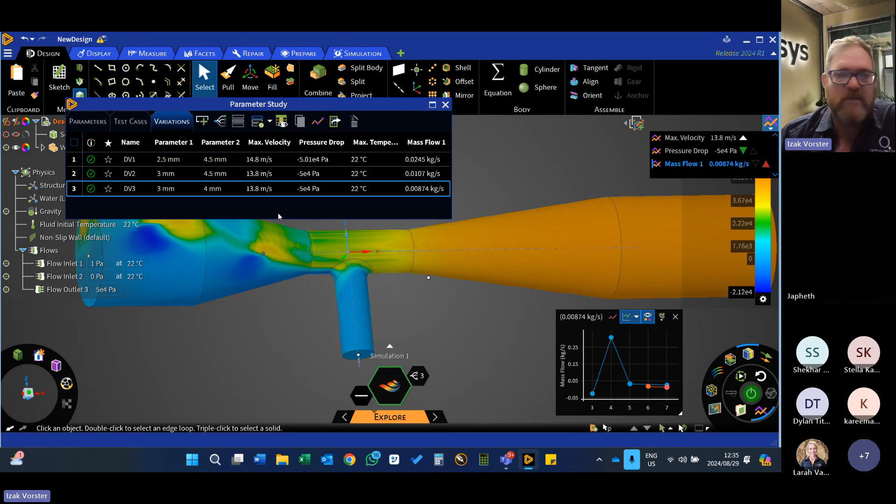And Synopsys is a company that is specializing in silicon chips. So they write the software for that. The reason why they bought Ansys is not very clear. They've obviously got a plan with it. My prediction is that they want to enable simulation on chip level. So if you've got some sensors or some electronics, you will be able to do some simulation on that chip. It will not mean anything to our business. I think we will carry on as usual. But I think this product will be developed tremendously with that acquisition. Right, there's the calculation. Yes.

Sorry, are they changing the name of Ansys, or does it stay the same? Oh, we don't know. Okay, we know nothing. So the acquisition happened in January. Then there's 1 year of a cool down period where everything is operating as usual. Because there's one product that Synopsys has got a monopoly for, and that's optics. There's some optics products. Okay. So they have to approve that in some way.

Yeah, that's interesting. But connect with me afterwards. I can share a lot of my suspicions with you in a separate meeting. All right. Cool. Thanks.

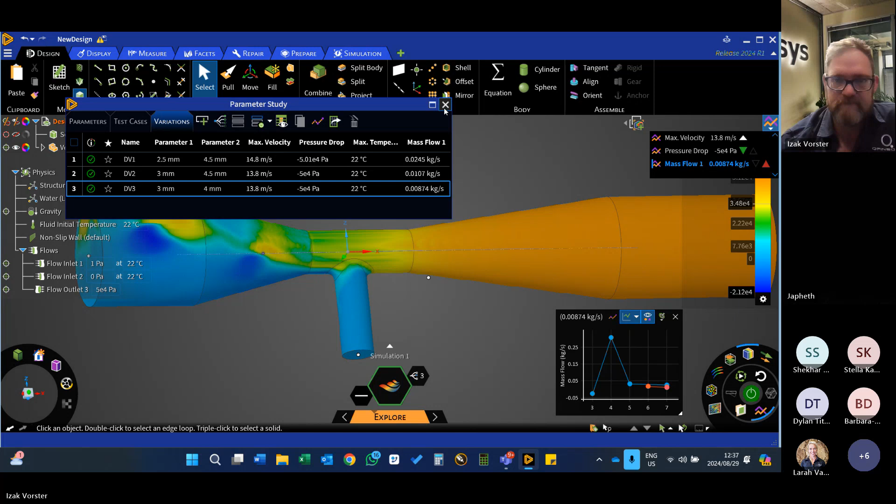All right. So there's the results. You can see how the flows are changing, or the mass flows through that inlet. It's changing very nicely, and you can very quickly get valuable results out of a concept phase from this software. Okay, next stage. Let's close this for a second. I can go now to the refine stage, and this is more traditional CFD, right?

There's a slider on all of these that indicates the accuracy. I'm going to make it a bit low now so that everything happens very quickly. And I can tell it to show the mesh. You'll see it's busy compiling a mesh. And this is now GPU meshing, so it's quite quick. You will also see that this works the traditional way. This is basically the Fluent solver that has been rewritten to run on GPU. I don't have a great GPU, and you will see even on mine, it's quite quick. Once it has the mesh, yes.

Question, sorry, is the GPU a specific license for it to use that, or is that standard? Yeah, I will show you at the end of the presentation how the pricing works. There's basically three modes of Discovery. The one mode is just the modeling part, Discovery Modeling. It's like the old SpaceClaim. The second mode is the Discovery part. That's Ansys Discovery Simulation. And then there's this Refine part. You have to buy an add-on, a simulation add-on, to be able to do this. Okay. So it is three license levels.

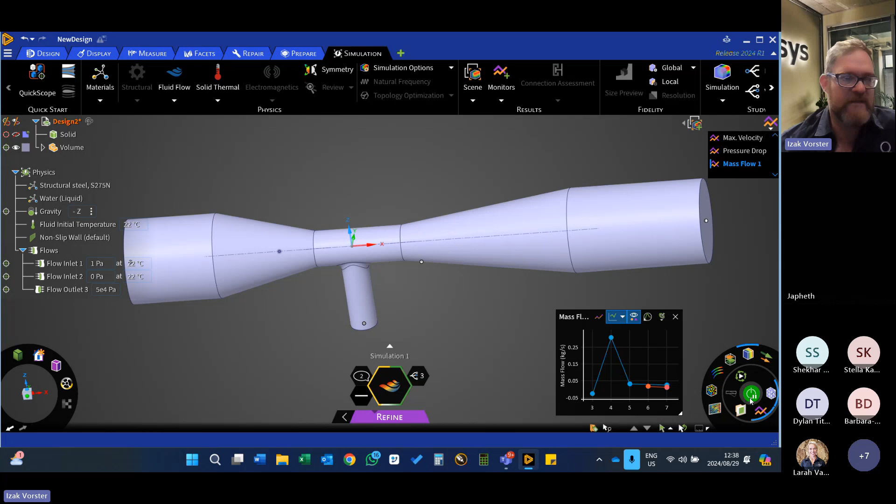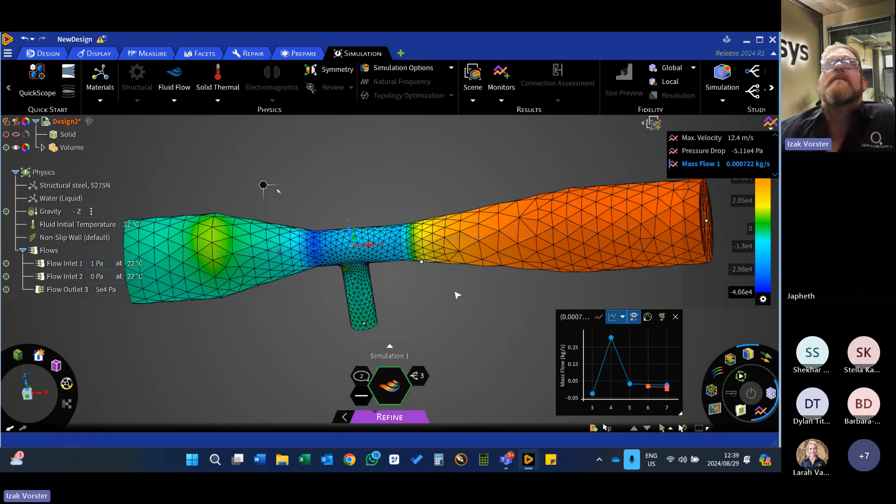So we did a demo the other day to a company that's making valves, for example. I think I have to just confirm the change. There we go. So there's the Fluent results. Sorry, guys. To get back to my example of the company we dealt with, they don't need the Refine phase. We actually did a case study comparison. It's flow through a valve. We did the simulation in Discovery Explore, which is the previous tab, we did it in this Refine version, and we did it in full Fluent. And they had experimental data, and the Explore phase results were actually exactly on par with the measured data.

The reason for that is Fluent most probably is more accurate than Discovery. But with the assumptions made in the tests and the assumptions made in Discovery, it's very realistic, because there are losses and things in there that the test setup couldn't capture. They couldn't make it any finer than that. But the difference in accuracy between Ansys Discovery and full Ansys Fluent was roughly 8%. And that's very good, in my opinion. It's also very usable, because if you have to specify trends, for example, the mistake will be the same for all the design variations.

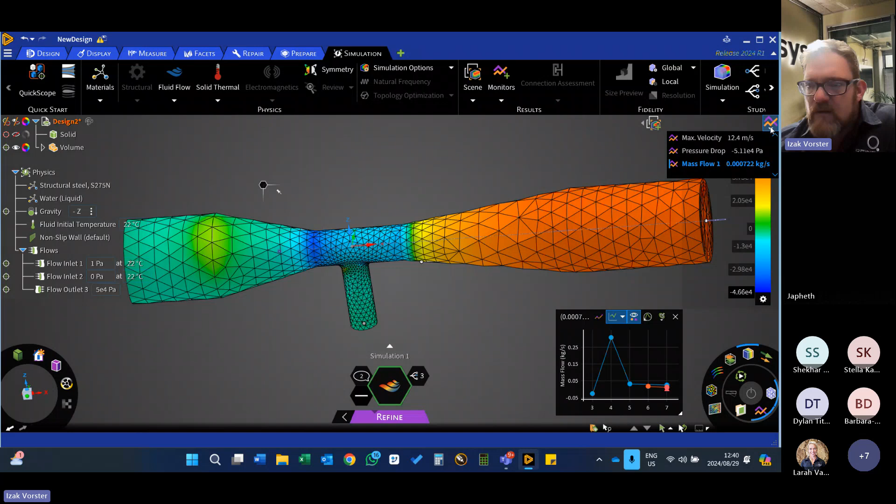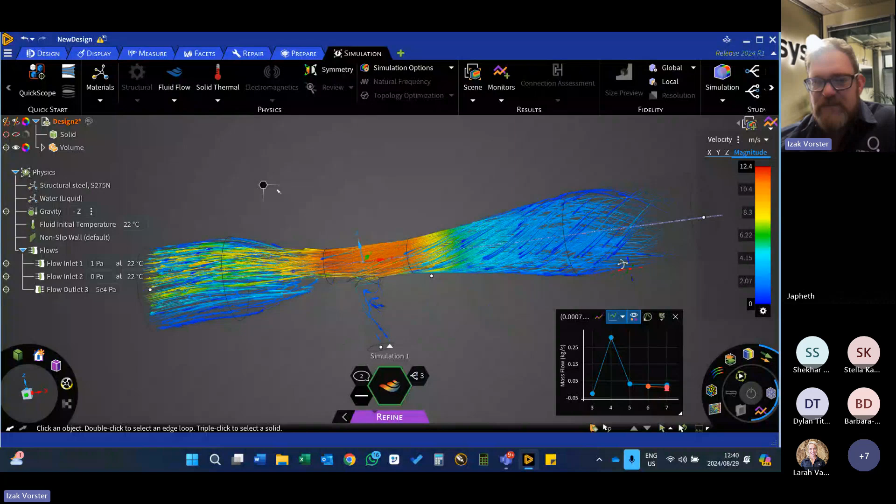Right, I need to minimize this thing now. Okay, let's go to velocity. This is now the Fluent solver giving you that result. There's the mesh. You can see the mesh now nicely. I can plot some fluid lines. You can see from the Fluent solver some swirl at the end there. You see it? That's perfect for mixing, by the way. I should keep this design. A nice mixing of the flow. You can also animate the result. Oh, I solved it in the wrong direction. Did I? Yeah, I need to reverse the numbers.

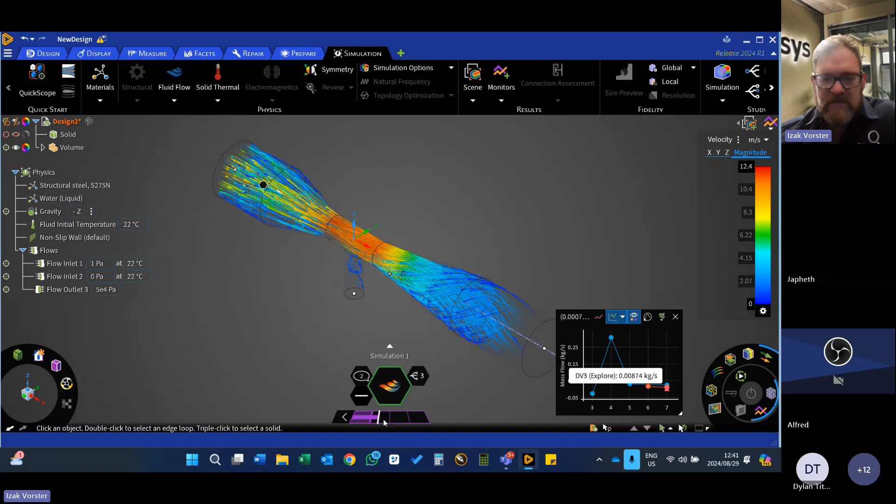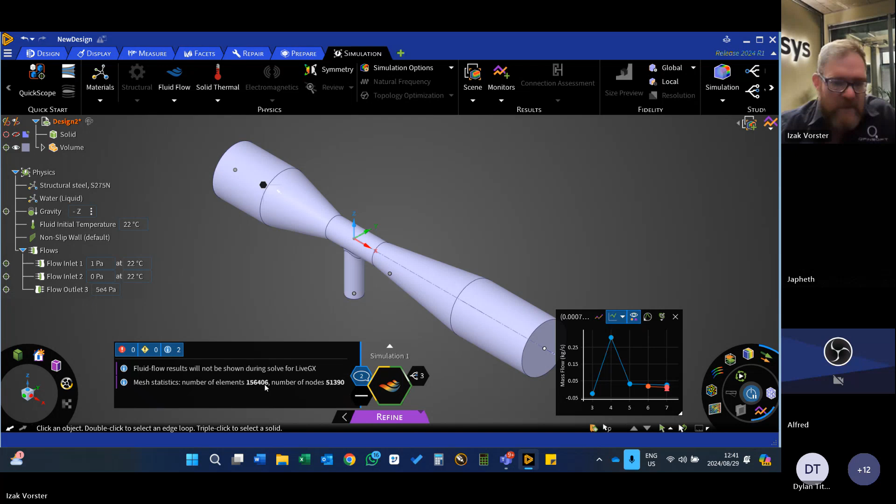Right. And then I can go now and refine this. Pause it there. I can even refine it further so that it creates a finer mesh. So let's just do that for a second. My graphics card is blowing away currently. Let's just wait for this while we talk. You see how quick that mesh was? That's a pretty cool mesh, guys. It's not perfect. Let's do it again. There's the mesh statistics. 156,000 elements. There's the new mesh.

I just want to look at the... Okay, the solver has stopped there. I don't need to continue further. I think our time is almost up anyway. But I think that gives you a very good idea of how this tool fits into the engineering toolbox. Any questions, guys?

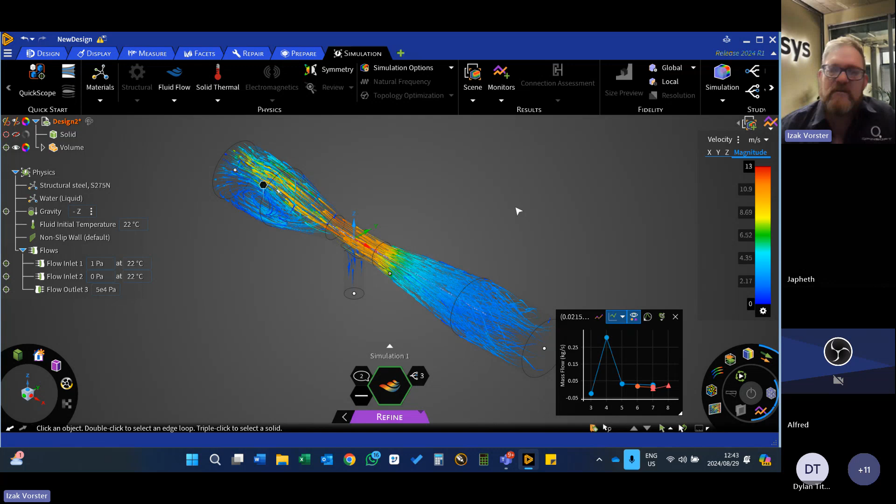Is there a symmetry feature? Sorry? Is there a symmetry feature for, like, if you're doing much bigger simulations? Not in Discovery yet. I believe that's a very easy thing to do in the solver, so I believe in future releases they will start adding that. The initial direction they took is they introduced the Fluent GPU solver into this product about two years ago. And once that solver is in here, the sky's the limit. They can add as much as they would like. They just need to rewrite the code for a GPU, because you author code differently for a CPU solver and a GPU solver. There's quite a big difference.